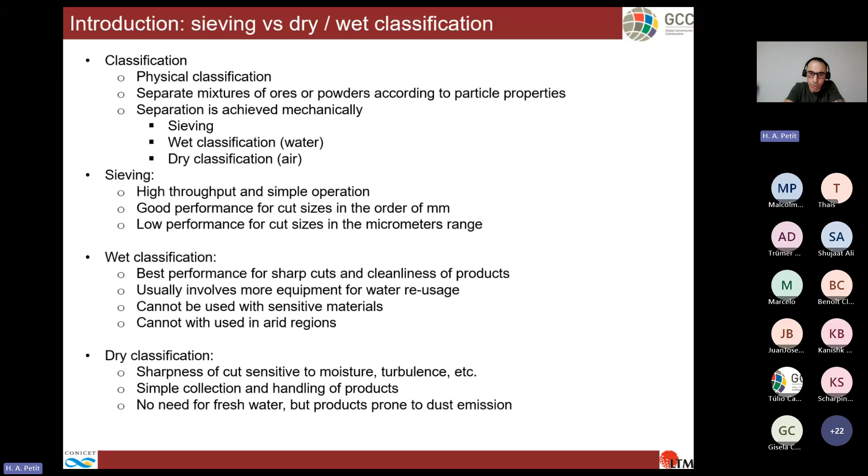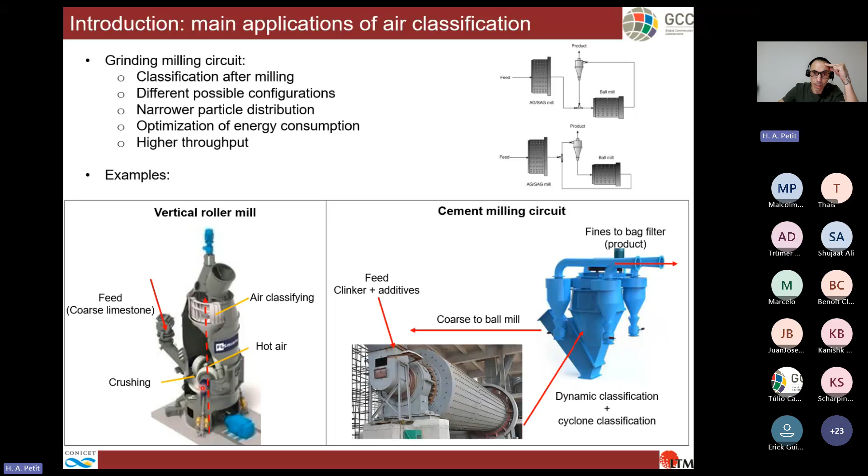The most common utilization of air classification, in the same way as wet classification, is to complete the milling circuit. There you can control the particle size distribution of the circuit and optimize the energy and the throughput. Two examples common in the cement industry: the all-in-one solution, the vertical roller mill, and the ball cement milling circuit. In both cases you have a crusher or a mill, and the outlet goes to an air classifier, which returns the coarse product again to the crushing or milling device to optimize the output.

A totally different utilization of air classification is as a heat exchanger in some cases. Again, in the cement industry, you have this precalcination tower, which you feed at the top with the material you want to send to the furnace or the kiln.

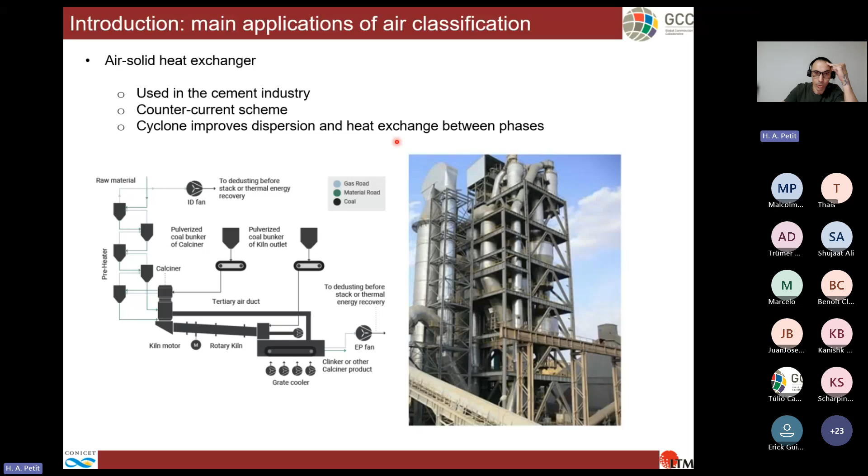And there you let it fall in a countercurrent scheme with gas, hot gas coming from the kiln. And in that way, air classification, in this case cyclone classifiers, gives you a high surface contact area. So it is a very good heat exchange unit that you can use to pre-calcinate particles.

So how does air classification work? It is based on the acting of different forces on a particle immersed in a fluid, in this case air. The dominant forces are gravity and drag. You may also consider lift and buoyancy. And of course, you have other interactions like particle-particle interactions, or adhesion or cohesion forces.

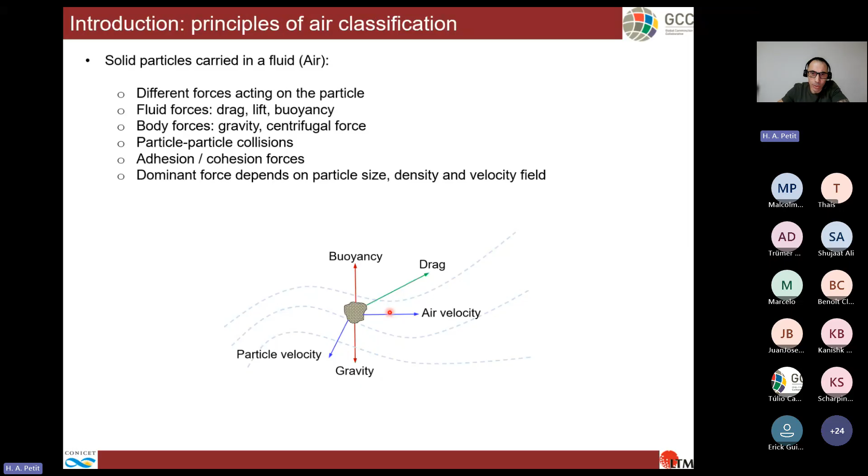So you can engineer a classifier device in order to have these forces acting in opposite directions. Just to illustrate, this is a zigzag classifier. In a laboratory scale, you feed the particles here, in this case iron ore, at the top, and then you pump a flow of air upwards. So particles fall while the air goes up.

If you take a minute to look at the particle located here in the orange dot, you may see gravity acting downward and drag acting upward. So fine particles are dragged by the air and go up with it, while coarse particles go down to the bottom. So you have a fine product and a coarse product of the classification. I use this nomenclature instead of overflow and underflow, which are inherited from wet classification.

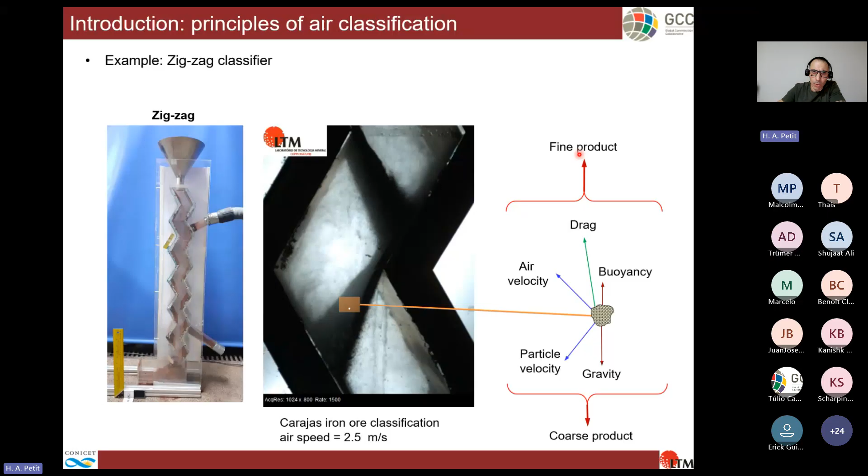So how do you describe the performance of an air classifier? For each particle size, you will have a probability to go to the fine product or to the coarse product. If you sum up all the probabilities across the range of particle sizes, you get a partition curve. Ideally, the partition curve is this one here in green, a step curve. So from a critical size, particles coarser than that will go to the coarse product, while finer particles go to the fine product.

That size is called the cut size, and it represents the particle size which has an equal probability of ending up in either the coarse or the fine fraction.

However, real curves are not as ideal, and you have two examples here in red. You have this sigmoid curve, which is quite common. At the cut size, you have a slope, and that slope is called the imperfection, or the sharpness of the cut. It tells you how selective the classification is.

Also, you may have this increase of fine particles, an increased probability of fine particles going to the coarse product. It is called the fishhook effect, and it is quite common in air classification. It is the outcome of adhesion or disturbances in the flow.

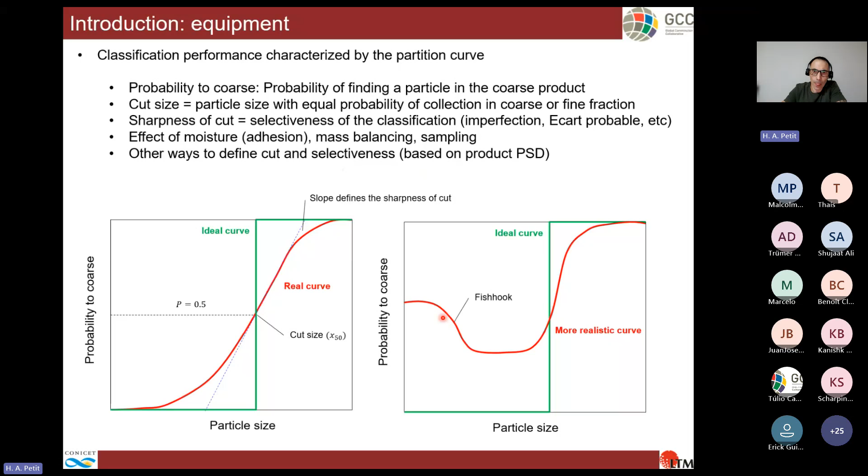In terms of energy consumption, you can describe air classification in terms of pressure loss. You can measure the static pressures at the inlet and outlet of the classifier, and the difference tells you how much energy is required to pump the air and particles inside the classifier.

Bibliography tells you this is the common way to describe energy consumption in the classifier. However, I think you should also consider the auxiliary equipment, because air classifiers are not a standalone unit. They usually require auxiliary equipment such as bucket elevators or conveyor belts. So the energy required to lift the particles or feed up to the feeding point is usually in the same order of magnitude as the energy consumption of the fan in these cases.

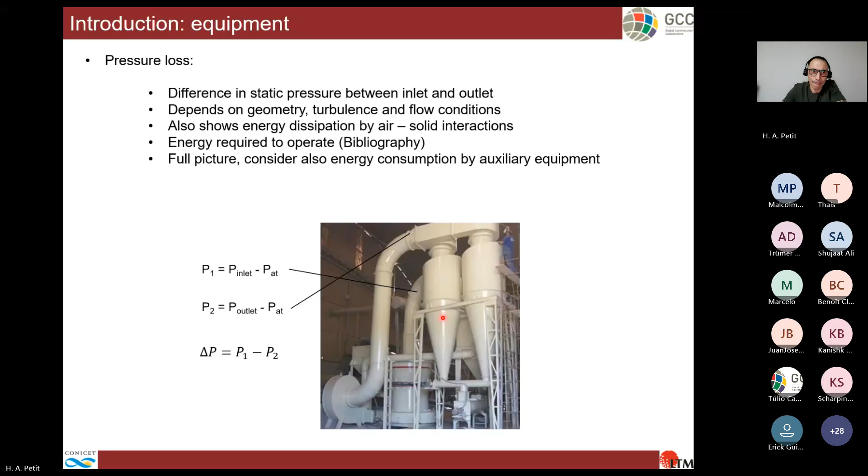There are many designs of air classifiers. Just to name a few, perhaps the most commonly known, and perhaps the oldest, is the cyclonic classifier. It is basically a cylinder and a cone with a tangential inlet of airflow, creating a centrifugal force field. Fine particles are dragged inwards, and coarse particles are pushed outwards to the outlet of the cyclone. You may also have more modern classifiers, such as the inertial classifier we will talk about later, or dynamic classifiers.

So dynamic classifiers are classifiers which have moving parts, with rotors or cages inside that create the airflow. Dynamic classifiers are usually divided into generations - first, second, and third - each one improving the performance of the previous generation.

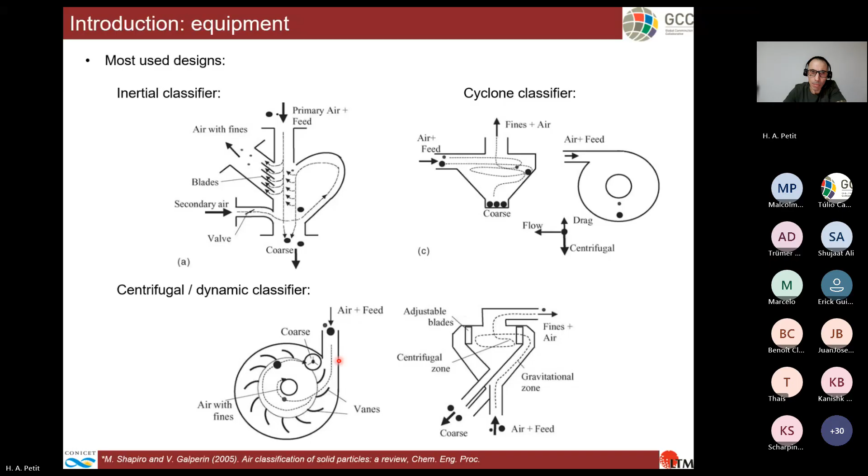So as I said, generally the air classifier is not a standalone unit. You have the primary air classifier where you want to cut your particles. Here you feed your particles that are going to be classified along with the main airflow, and generally that will give you the coarse product.

Fine particles will go to the auxiliary air classifier, which is a secondary unit. The main reason for this secondary unit is to dedust the gas, the air, and extract the greatest amount of particles before sending the air to the bag filter. If you don't do this secondary air classification, you end up with problems in the bag filter, or you may need a very big filter, which comes with high cost.

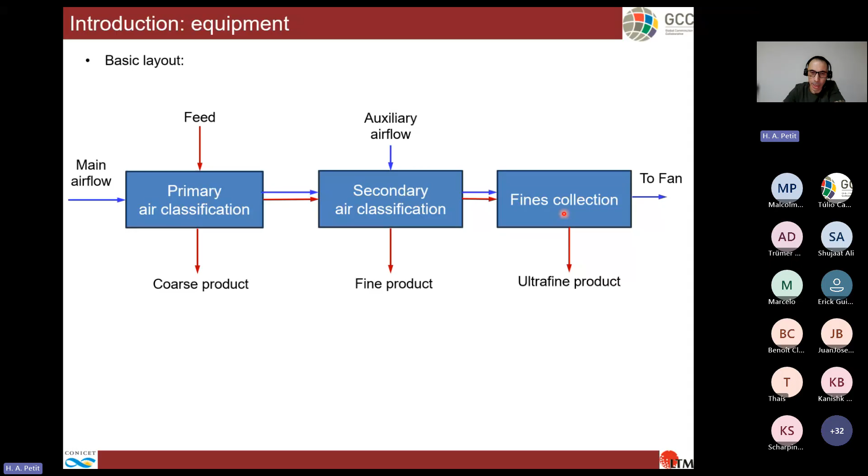And how do you model air classification? The most common way is to use computational simulations. However, you may go to phenomenological models or empirical models, but in latest years everyone is using this type of simulation. So the typical use of computational methods is to use an Eulerian-Lagrangian approach.

In this approach you have two phases, the air and the particles. The air can be solved using CFD solvers, and solid particles may be solved or simulated with DEM or DPM methods. DEM and DPM are quite similar methods, but DPM is like an oversimplification of DEM, which does not account for particle-particle collisions, additional forces, or volume fraction of the particles in the air.

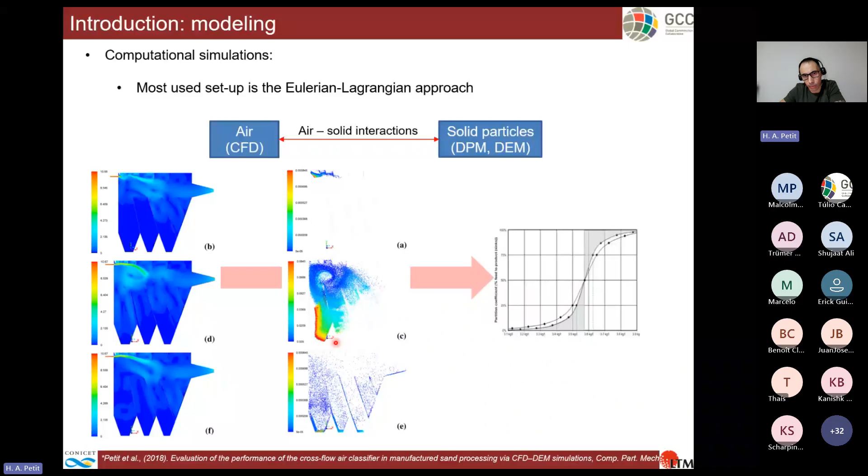Of course, you need to couple those methods and consider air-solid interaction in order to have the full picture. So you solve the CFD as part of the airflow, then you inject particles and track the trajectories, and you can count where each particle is going, and sum up to have the partition curve.

Another approach is to use a full Eulerian approach, in which both phases are considered continuum phases. Both the air and the particles are considered Eulerian phases, and you can solve them both in a CFD solver. The downside of this approach is that you require one particle phase for each particle size. So if you want to compute the partition curve, it is not straightforward. You need several phases, and usually the solver will have divergence or numerical problems.

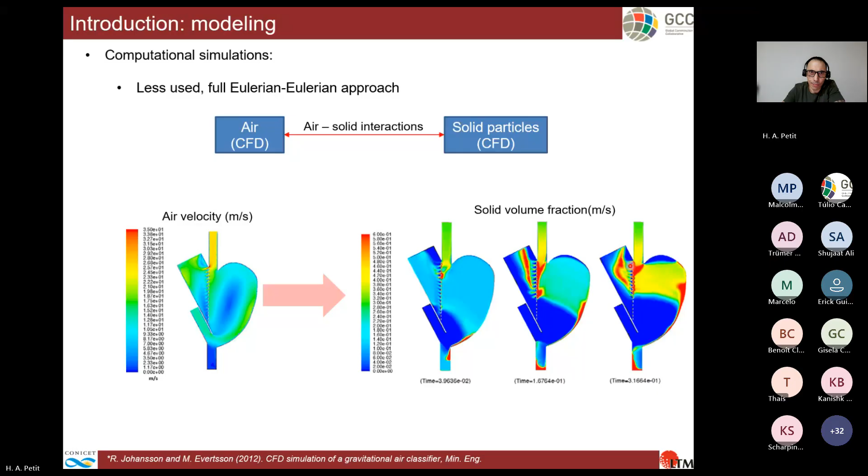So after this brief introduction, I will illustrate air classification with two main cases of study. As Professor Tavares said, I did my PhD in Argentina, in a region where Buenos Aires province is located, where there are a lot of quarries, small quarries. They produce coarse aggregate for concrete, crushing granite and dolomite.

As a side product, they obtain the fine part, which is what they call sand, with a top size of 3 millimeters or 6 millimeter sand. That product was discarded throughout history up until the 90s, when it started to be used as manufactured sand for concrete production as well.

However, if you see the PSD of a typical manufactured sand, in green, and in red the standards for fine aggregates in concrete, you see that manufactured sands present a content of particles smaller than 75 micrometers which is higher than expected. So if you want to use manufactured sands in concrete, you need to extract those particles.

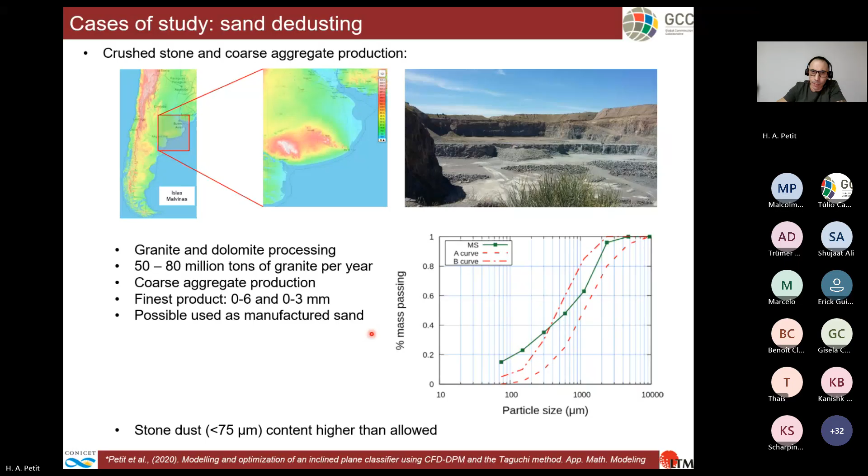So what they do in the quarry is use a water washing process. They feed the sand to the washer along with fresh water coming from a flooded quarry generally. They mix it in the washer and extract the coarse particles with a screw or bucket elevator. The fines are mixed with the water and form a slurry, which is the overflow of the washer, and it ends up being pumped back to the flooded quarry, which acts as a natural decantation system.

So the way we saw it at the time, they are sending fines to the quarry, but also losing money because these fine particles require a lot of energy to achieve that size. So what about trying to recover those fines and see if they have a different technological application in other industries?

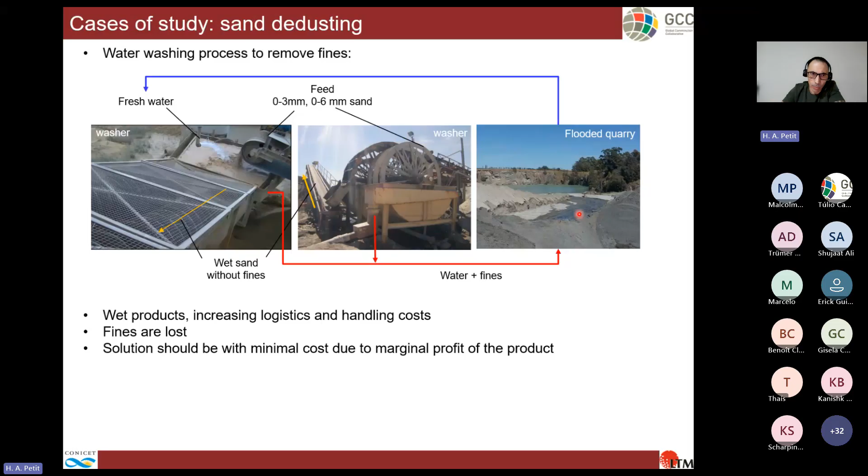There were different solutions at the time provided by dealers like Metso or others, but they were too costly for the quarry owners. So we tried to develop some simpler designs to replace the water washing process, and we started with very simple models of air classifiers.

Just to illustrate here, we have this inclined plane classifier, which is a classifier in which you feed the manufactured sand, and a very low velocity airflow goes up and extracts the fine particles. So we realized that we do not need a fancy classifier to do this. It's just to dedust the manufactured sand. So a very simple design with a very low energy consumption will do the task. We just need to extract the minimum amount of particles.

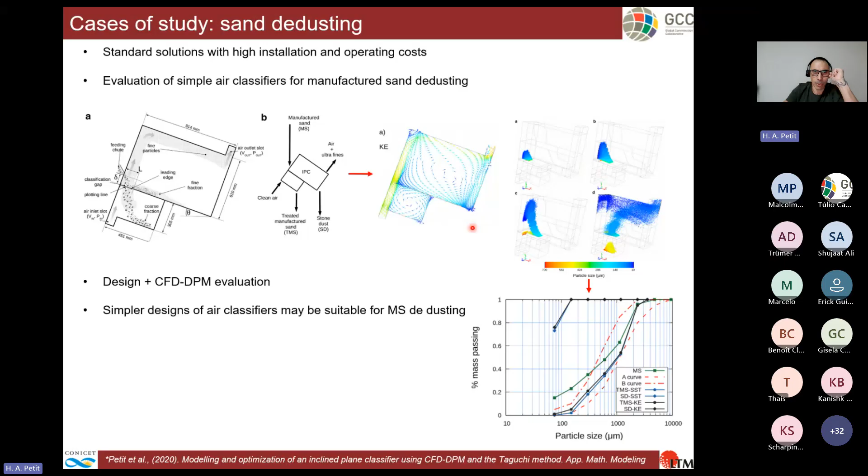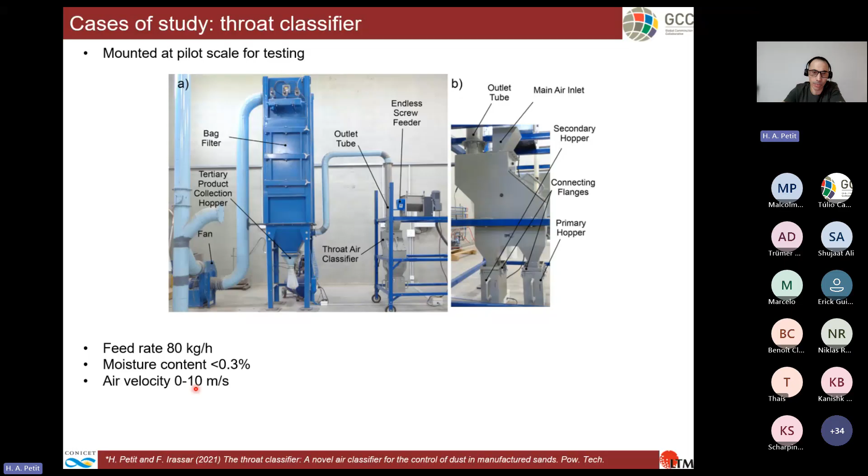And we tested in different configurations of the deflector. We'll just talk about one of the positions of the deflector, which is this one here. And we tested with and without the secondary airflow with different velocities.

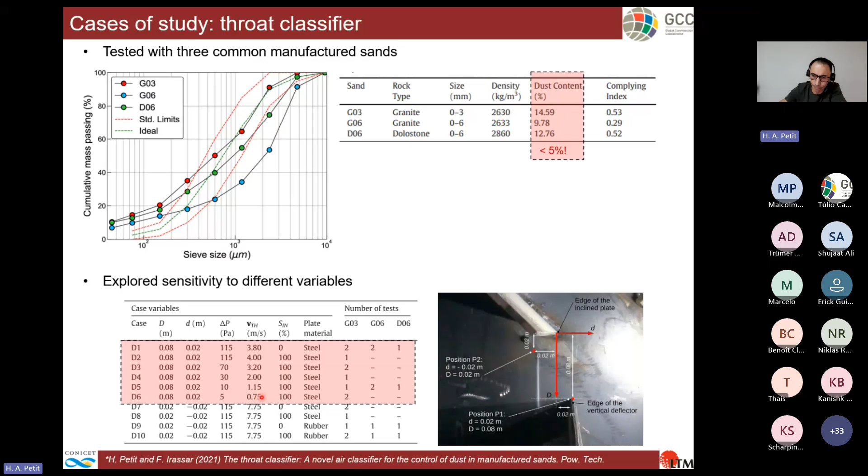And so we did. We tested several velocities as low as 0.75 meters per second. And we can go from the D2 case to a primary product meeting the standards with very low velocities. Of course, if you have high velocities, more particles are extracted from the sand and go to the secondary product. So the secondary product gets coarser, and the tertiary product as well, because some of the particles go to the bag filter.

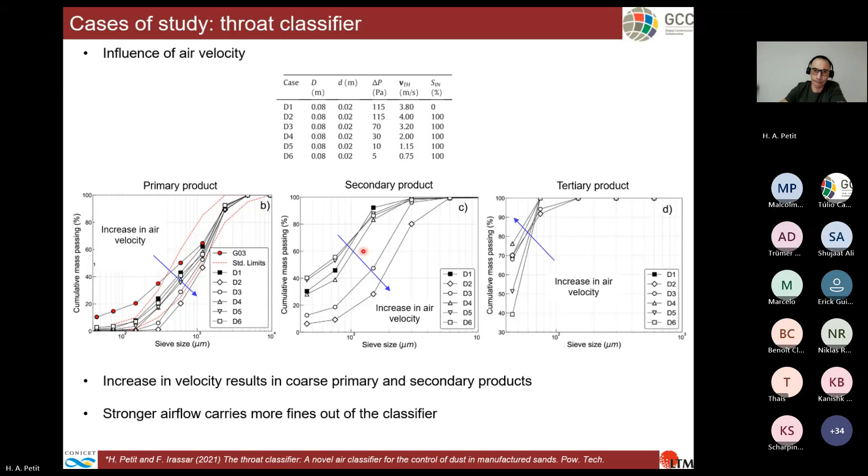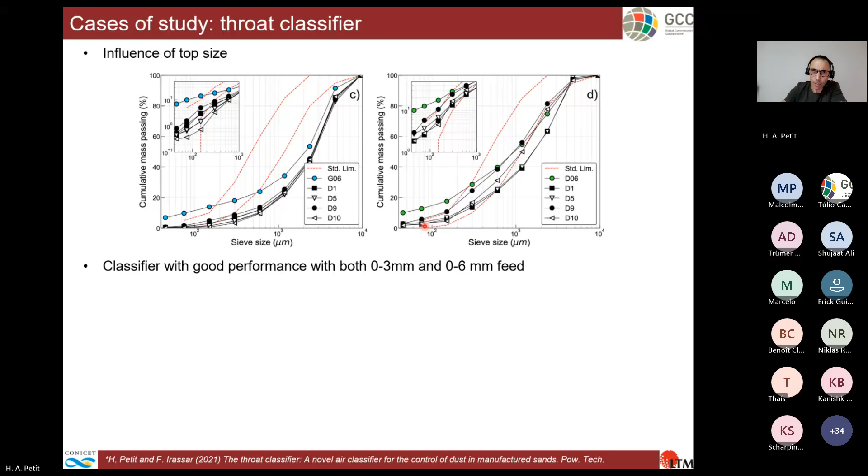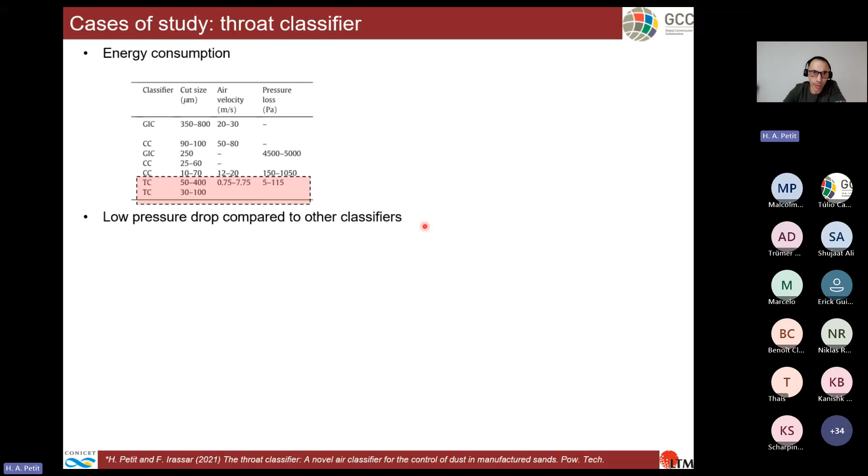In terms of energy consumption, if you compare pressure losses of this classifier with other similar classifiers, you see that it presents quite low pressure loss and very low air velocities. So in terms of energy, it has great potential.

So you have some versatility here with the deflector, which can be used if you want to use the classifier in other industries.

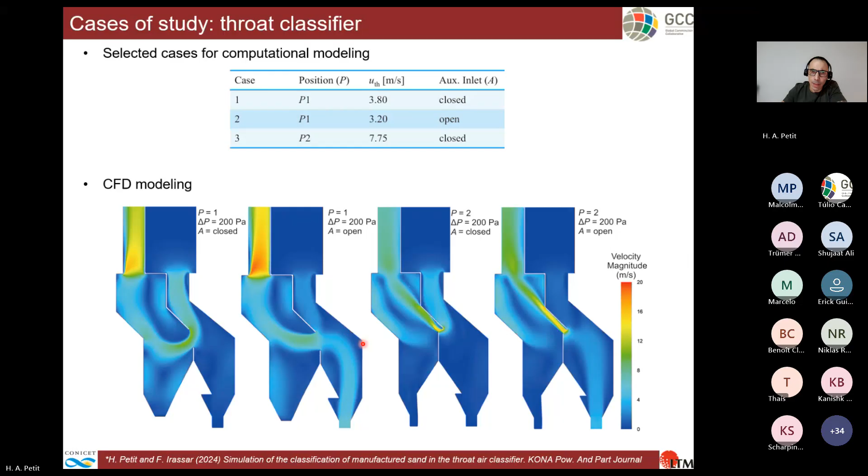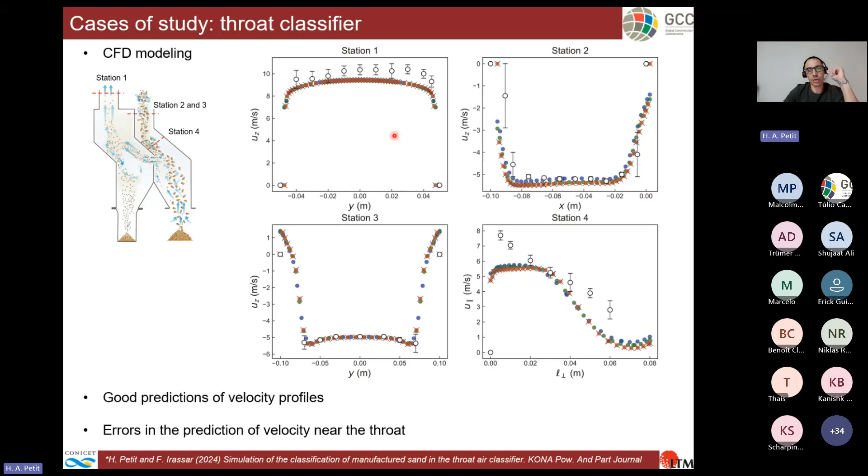We, of course, validated this with measurement profiles from the throat classifier, giving us good adherence between simulations and experiments.

If you pick here the DPM results, you see in case 1 and case 2, they just differ in the opening of the secondary airflow. Case 1 just has the primary airflow, so particles fall and coarse particles in red go directly to the primary product outlet. Some blue particles, which are dust particles, go to the secondary chamber, and some of them settle there.

When you have the secondary airflow open or being used, almost all dust particles are extracted from the sand, and that is in very good agreement with what we found in the experiments.

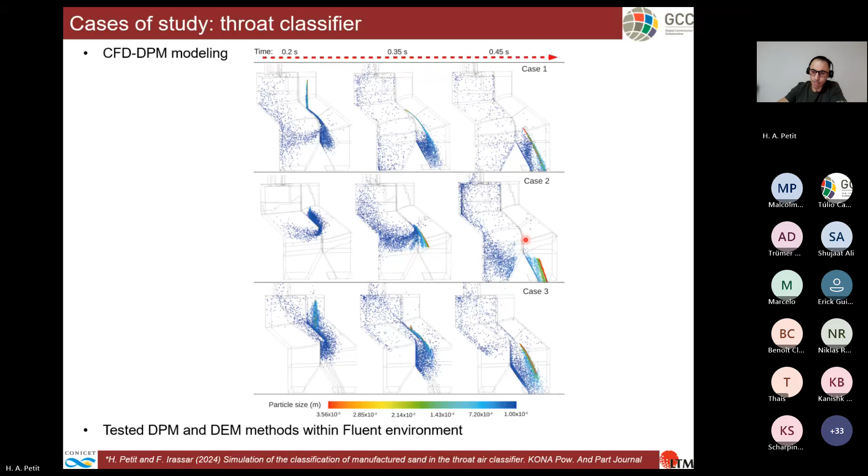Of course, you can refine the simulation in order to have more accurate results of the secondary classification that happens in the secondary chamber.

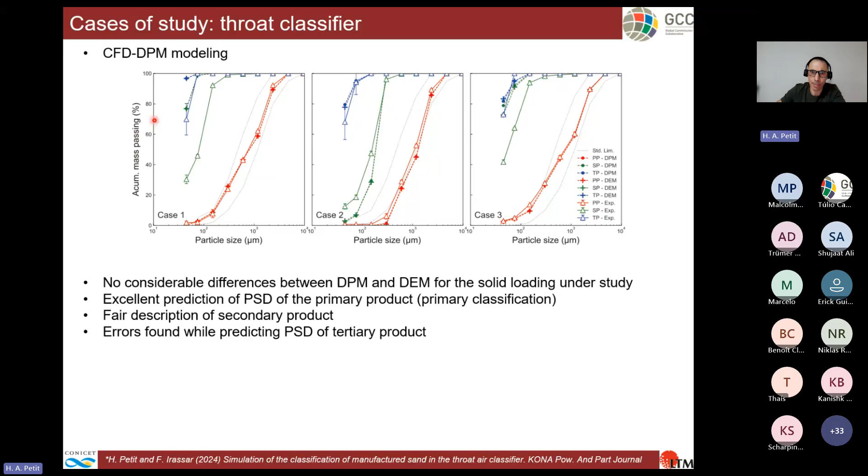After we had this pilot scale test, we wanted to compare how this classifier worked compared to the washing process. So we went to the quarry and took some samples. Here is the sample that we took, a 0 to 6 millimeters raw sand.

We also have some samples of the water washing product, the washed sand, and we compare this to the primary product of the throat classifier. In terms of fine particles, the raw sand has almost 10% dust, and the water washer removes only 6%, while the primary product of the throat classifier has less fines.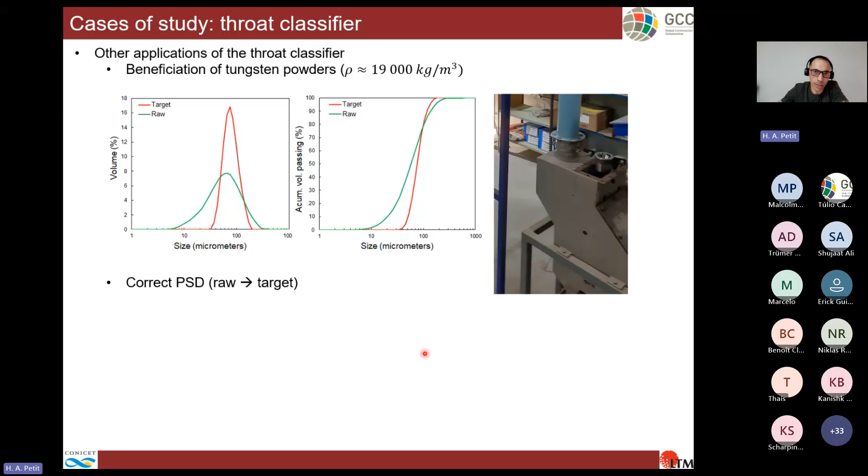This illustrates how this classifier could be used in other types of industries and not be limited to the aggregate industry.

Another project currently in progress in Rio de Janeiro is quite similar, and I will present it today as well. It's a gravitational inertia classifier, in a gneiss quarry instead of a granite quarry, with a tertiary crushing scheme including a VSI crusher fed with coarse aggregate. The VSI product goes through a double screen deck. The fine product of the screen deck is intended for use as manufactured sand, and the fine of the sands is intended as filler in the glass industry.

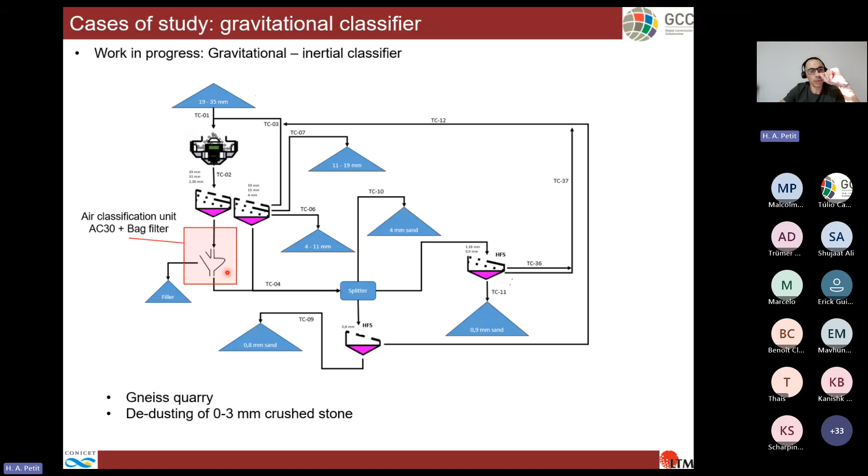They bought a complete solution from Metso, the AC30, and we are giving some guidance and trying to optimize the process with them. Here you see the air classifier, the AC30, which is mounted right now. It goes directly to the bag filter and doesn't have a secondary air classifier.

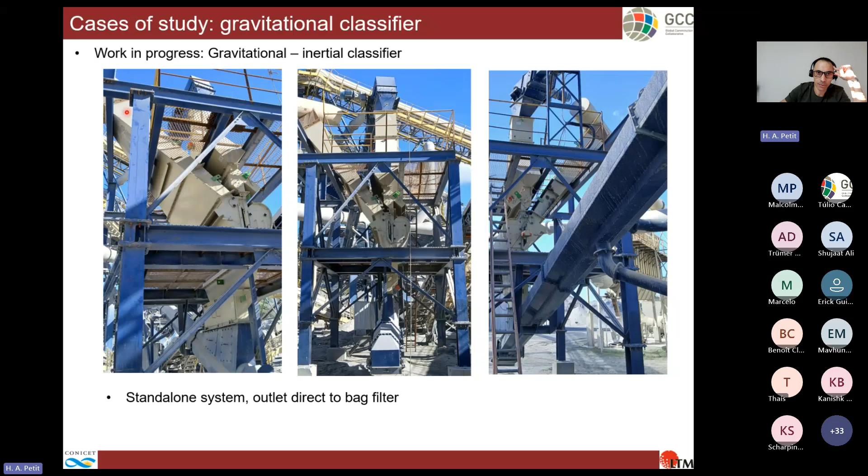How does it work? You have the feed, which is the VSI outlet, and it goes in a cascade manner along with the primary airflow. Both the feed and the primary airflow go in a co-current scheme until a classification region, where particles can follow the path of the air, which has a very sudden change of direction here toward the outlet.

Some particles may follow the air, and others go down to the bottom of the classifier, where they meet a secondary airflow. That airflow lifts the particles back up to the recirculation region, and then to the classification region again, so the particles have a second chance of being classified. The classification process can be tuned with these two air valves, changing the contribution of the primary and secondary airflows.

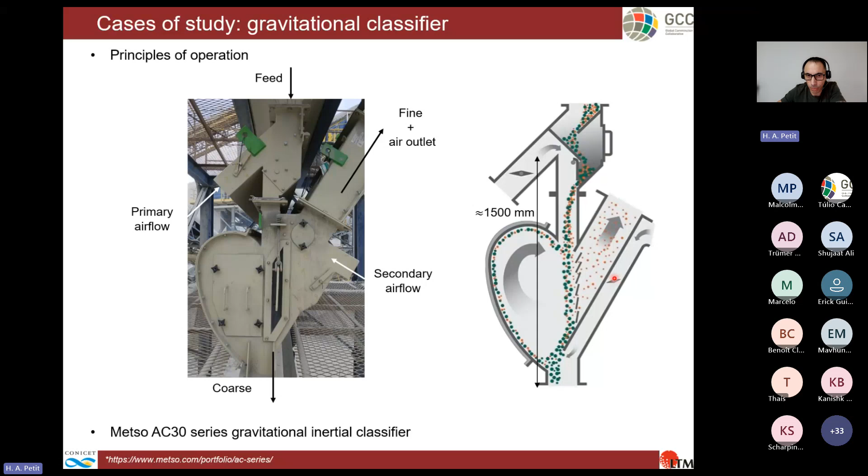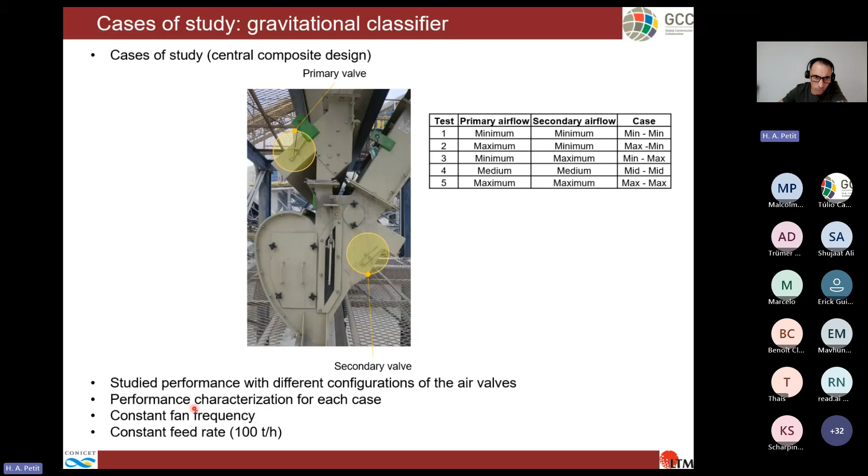We were allowed to play a little bit with this classifier, so we performed a very small central composite design in the industry, changing the valves to the minimum and maximum, along with a medium point. So we have a minimum airflow and a maximum airflow case. We did this with a constant fan frequency and a constant feed rate of 100 tons per hour.

We also had a chance to measure the air velocity in the inlet, primary and secondary, and also the pressure losses in the valves and in the overall air classifier. We did this with and without particles being fed to the classifier, so we have the case with only air in the classifier, and the case with the mixture of air and particles.

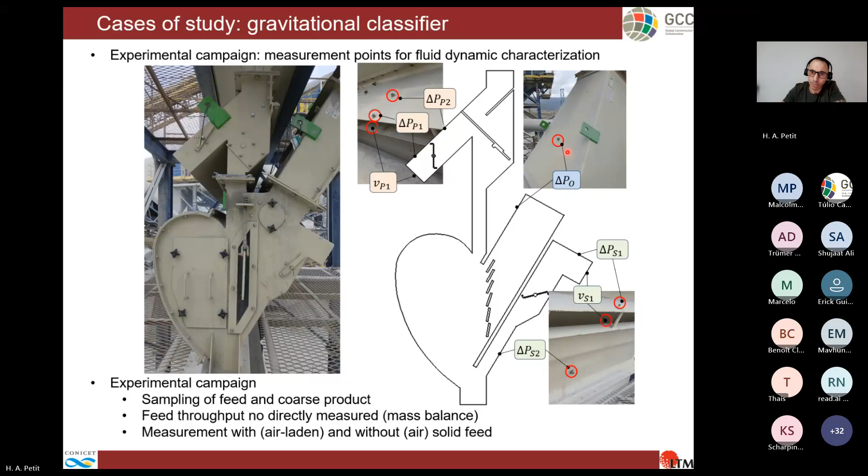Let's see some results here. We have the total flow rate versus each case and the pressure losses. In white, the case where there's only air in the classifier, and in brown, when you have air and particles. Of course, the minimum case is where the minimum flow rate occurs, and here you have the maximum flow rate.

In every case, when you put particles, generally the flow rate decreases, and the opposite happens for pressure loss, since pressure loss is the opposite of the flow rate. The minimum case is where the greatest pressure loss happens, and the maximum flow rate is where the minimum pressure loss happens. Here you see how injecting particles into the air classifier creates a pressure loss jump in each case.

When you put the results this way, you see that the air-only results are more well-behaved, whereas air-laden flows present more scatter. I think this could be explained because the bag filter is operating and being cleaned with a certain frequency, and also you have fluctuations in the feed rates, so you get this scatter. However, in both cases, you can just infer the pressure jump curve of the fan.

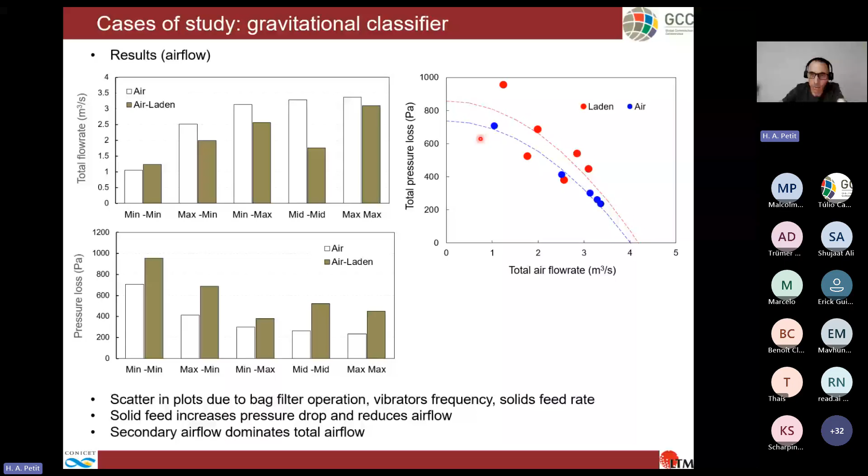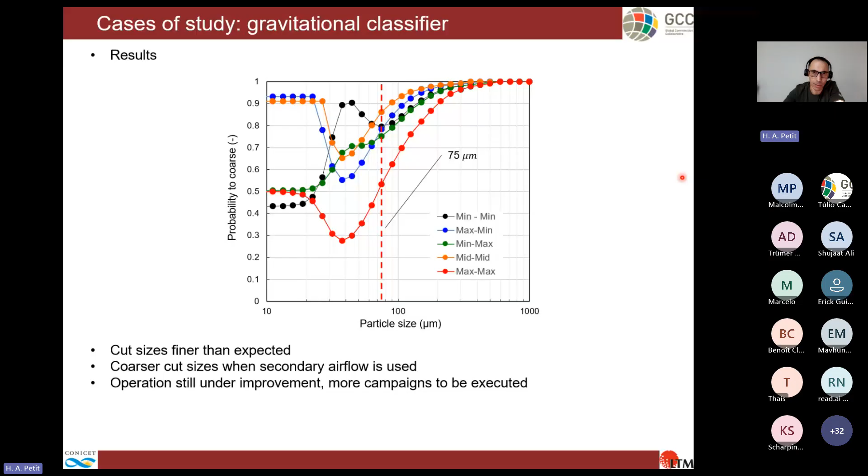This is just an ongoing work, and these are partial results. But of course, we are trying to simulate this as well. We are developing what I call a fast CFD-DPM modeling, in which we want to simulate what's happening inside the classifier, but we do not want to have very large computation times.

So in order to achieve this, I reduced the computational domain of the classifier to a slice, eliminating the valves and other non-dominant geometries. The slice is about 50 millimeters, whereas the whole classifier presents a 3 meter wide width.

And for solids, I am using the DPM method because it is fast and it can be used in the same CFD solver. But I cannot use the whole PSD of the solids because there are too many sizes and the amount of particles I need to inject in the simulation is too large.

So what I did is go to a coarse graining scheme based on momentum, mass, and volume conservation. I'm just injecting one particle size, trying to achieve the same effect of the whole solids going through the classifier. I call this the bulk particles.

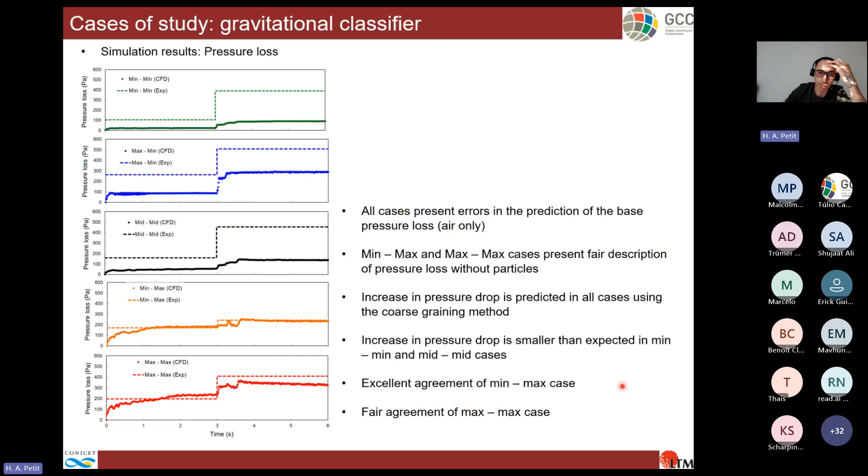So what's happening here is the DPM method is not accounting for particle interactions or the volume fraction of the particles inside the classifier. So in order to have a fast simulation, you need to accept some errors.

So how can we improve these simulations? We can change the coarse graining scheme or use more bulk particle sizes. We can change the boundary condition or include more precise turbulent effects. Or we can even migrate to a full DEM environment.

There we can consider all particle forces, adhesion forces, and collisions. However, any of these points will present very large computation times compared to what we have now. Just so you know, one simulation or one case now is taking almost a week. If we go to a DEM environment, it could take months to resolve.

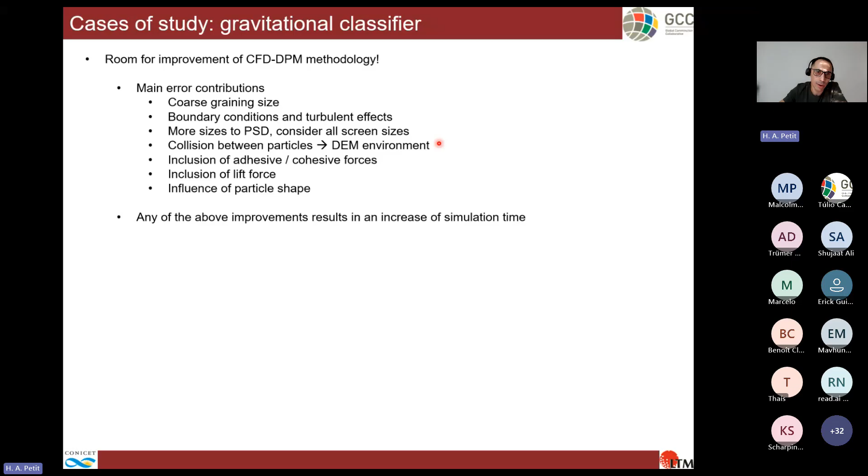So just to illustrate some of these topics, I changed arbitrarily the coarse graining size to half the value. The computed value of the coarse graining size for bulk particles, in order to conserve volume and momentum inside the classifier, was 1 millimeter. And I changed it arbitrarily to a value of 500 micrometers.

And you see the results here. In violet, you have the results for the coarse graining size of 500 micrometers, and you have an increase in the pressure loss due to the particle presence. This makes sense because fine particles exchange momentum more efficiently with the air. However, I think this exaggerates the effect of pressure losses.

On the other hand, if you check the partition curve in the 2 cases, there is not much change. The red line here, with the 500 micrometer bulk particles, gives almost the same results.

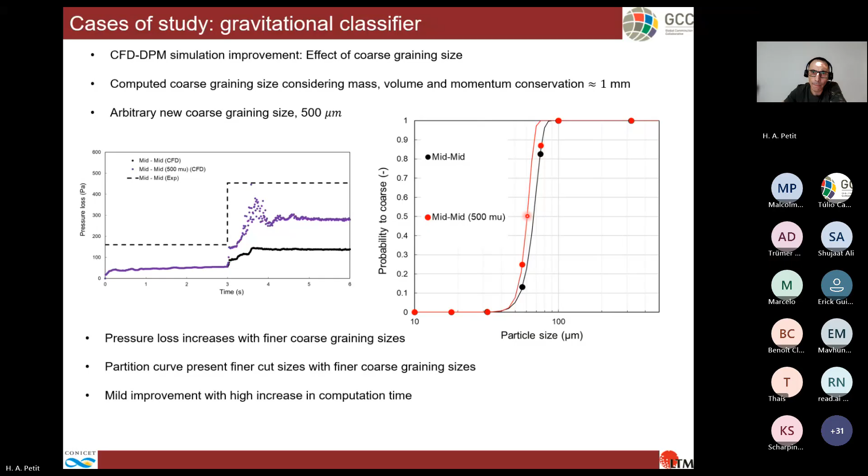Another way we can improve, and we are doing it, is to use more specific boundary conditions for the slice domain. To do this, I simulated the whole air classifier using a symmetry condition at the plane of symmetry. After simulating the whole classifier, I extracted specific velocity profiles from the full solution and fed it to the sliced domain, so now I have this sliced domain simulation with more specific boundary conditions.

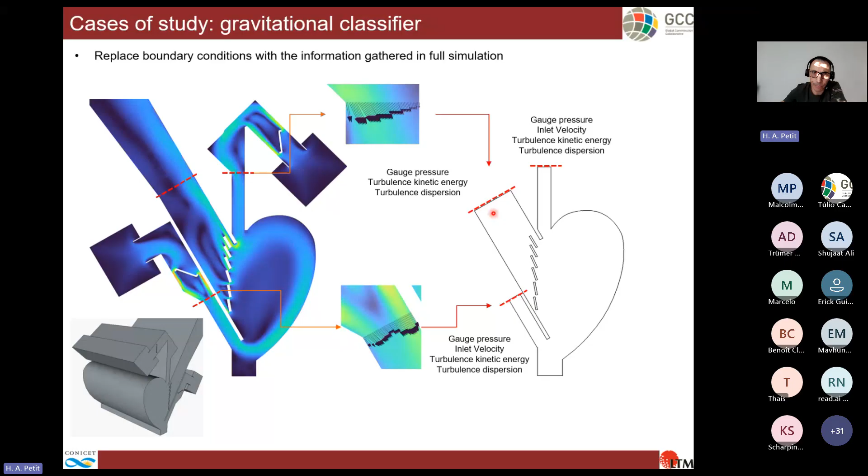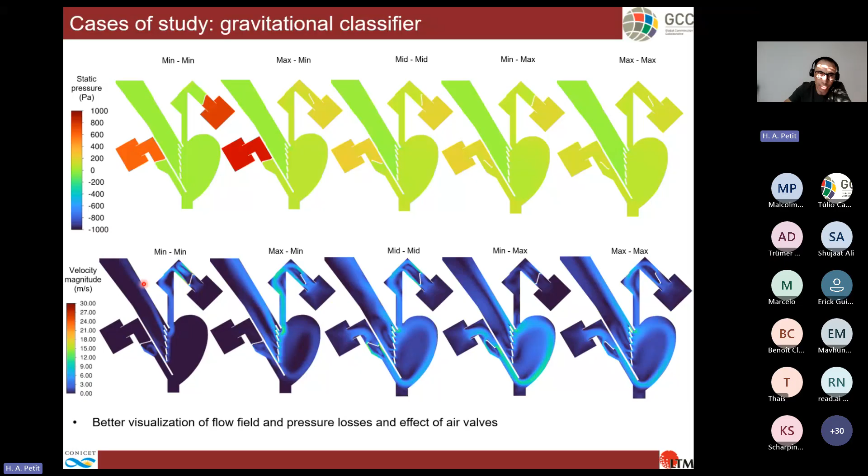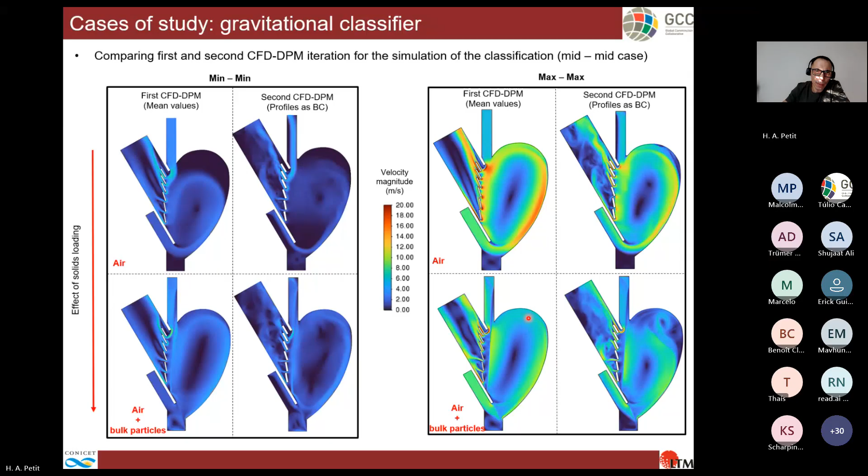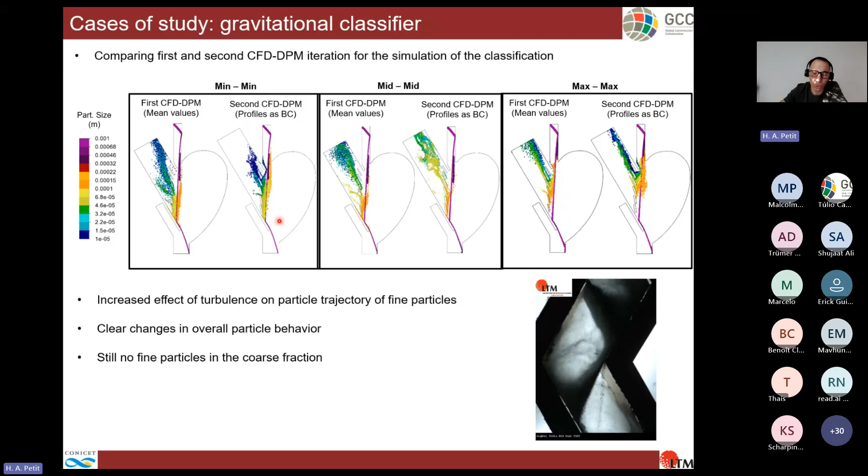However, it is not a fast way anymore, because you have to perform a full solution of the classifier to have this more accurate result.

In terms of the partition curves, you see here in full dots the improved version compared to the dashed line plots, which is the first iteration of the fast CFD DPM method, and compared to the experimental values in gray. So now you have finer cut sizes in more agreement with the experimental values, and you have more imperfection, which also occurs in reality. So there is an improvement in using better boundary conditions for the CFD case.

However, there is still a lot of room to improve this technique and to have more accurate and realistic results.

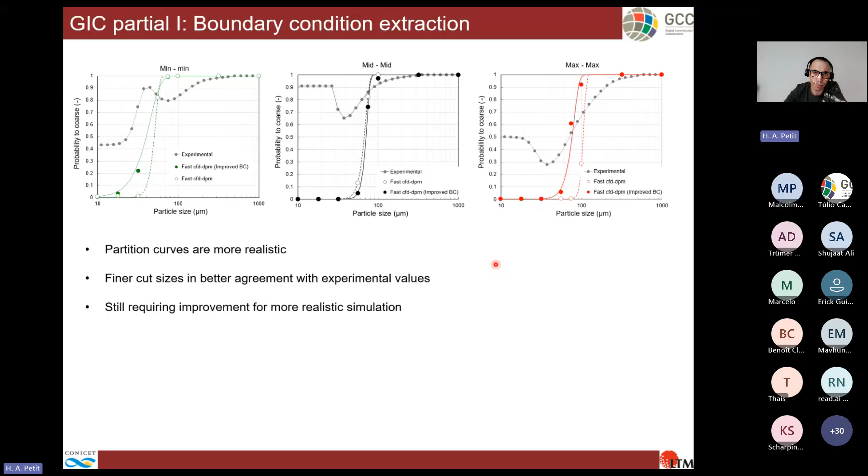My time's up, so to sum up this presentation: air classification is a tool used consistently across multiple industries. It presents a simple operation and design as well, and the performance is defined by the pressure loss, the cut size, and the sharpness of the cut. However, classification mechanisms inside the classifiers are quite complex, mostly due to particle-particle interactions as well as turbulence inside the classifier.

There are different computational modeling techniques we can use to have these methods going and obtaining good results. However, you saw that there is a lot of room for improvements, and that's a challenge we need to address in the near future to have more realistic and accurate simulations for this type of process.

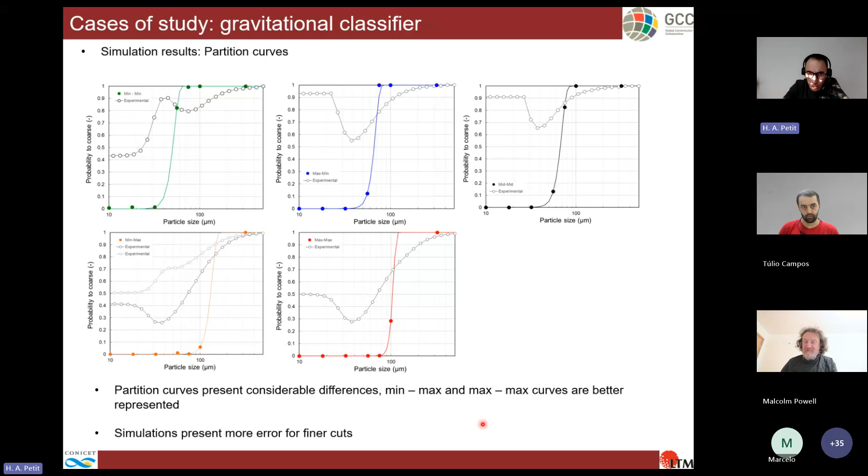Malcolm, thanks for the question. Regarding that question about the energy, it was too small, I'm sorry for that.

So the electrical energy used per ton was about 2.53 megajoules per ton. And—

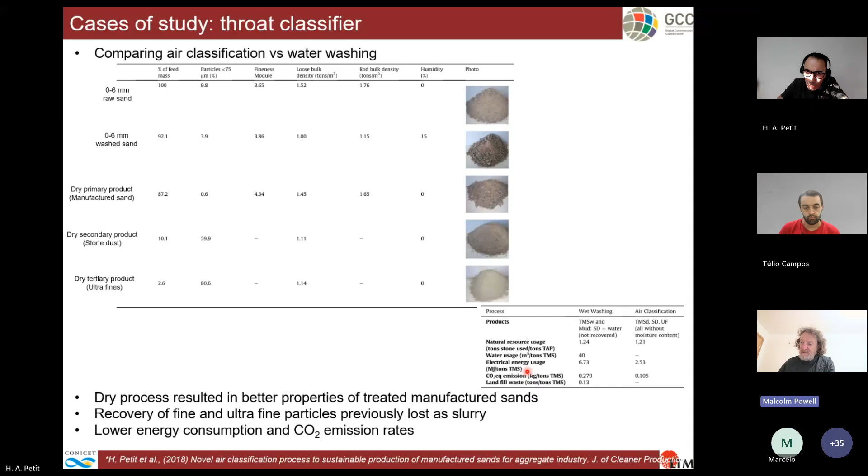The throat classifier: the velocity was measured at the throat because you have two inlets, one at the top and one at the bottom. You can measure both, and you get the total airflow there. So the velocity is at the throat, and the pressure loss is measured just at the outlet and compared to the atmospheric pressure, because you'd otherwise need to measure two pressures, at the primary inlet and the secondary inlet.

They may differ a little bit because of the acceleration of the air from the atmosphere to the inlet. I thought at the time it was best to see not only how air accelerates inside the classifier, creating a pressure loss, but also how it accelerates from outside to inside, which also creates a pressure loss. So measuring just the outlet and comparing to atmospheric pressure gives you the whole picture.

I understand, yeah, that's what I was guessing. Yeah, so the throat velocity is really low—0.75 meters per second is really low for air classification. I was surprised by that.

Yeah, it was very low. Of course, we tested with rather decent feed rates, and if you increase the feed rates, you may need more velocity. At the time we didn't have the equipment to do that, and then I moved to Rio, and the project stayed silent for a while.

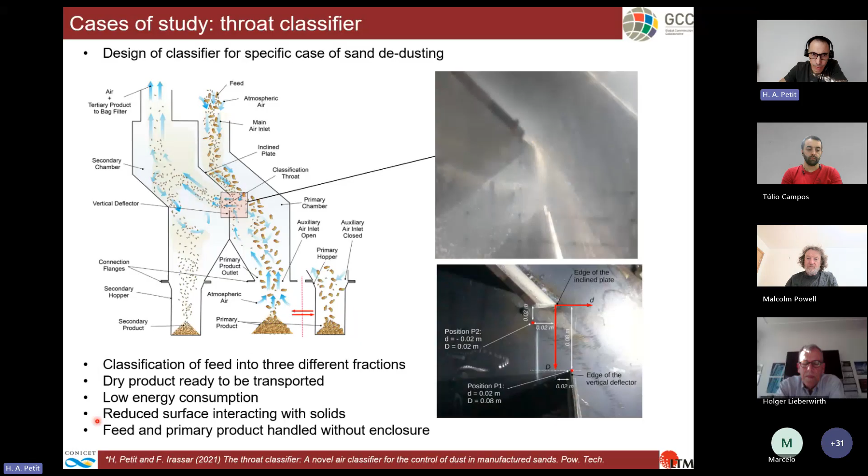You have the CFD solution from 0 to 3 seconds, it's only air. Then you inject the bulk particles for about 3 to 4.5 seconds, which is approximately double the time that particles require to fall from the feed inlet to the bottom. Then you see that pressure losses stabilize. And then you have a very small step of tracer particles, and then a transient regime until at the end you compute where particles are, how much went to the outside of the classifier and where. Then you compute the partition curve. So the total simulation is 6 seconds, and that takes at least a week for now.